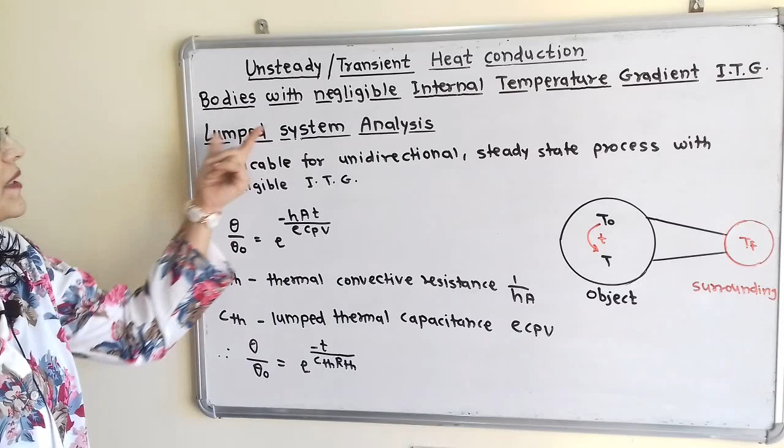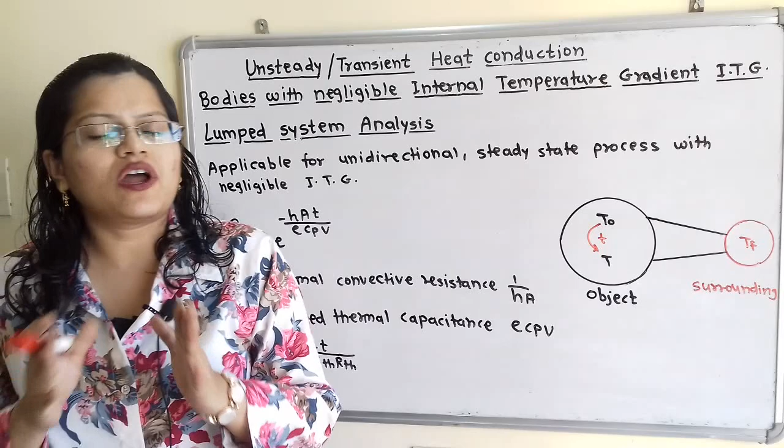During heat transfer process, some bodies behave like a lump. That is, its interior temperature remains uniform at all times when the heat transfer process is taking place. And this is known as the lumped system analysis. And this lumped system analysis is applicable for the unsteady state process when internal temperature gradient is negligible. Now we know that we use the formula for unsteady state process when internal temperature gradient is negligible.

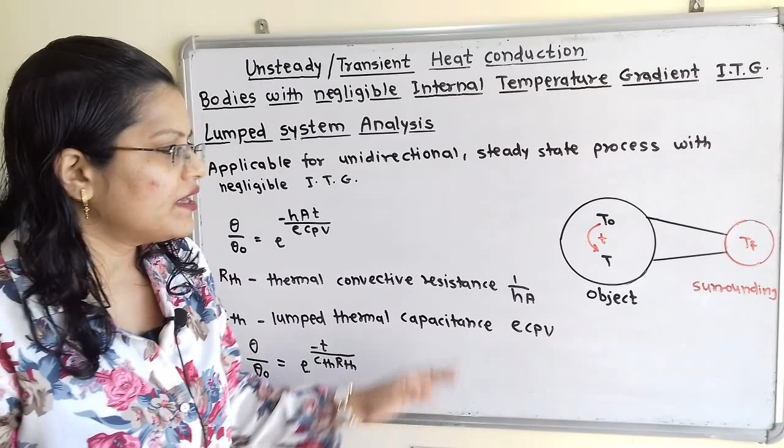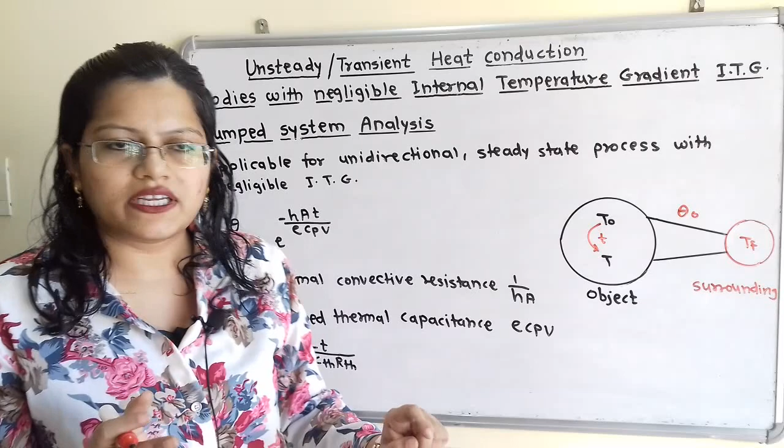Theta by theta O is equal to e raised to minus hAt by rho Cp V. Now we will understand this with the help of this diagram. When the initial temperature of the body at time t equal to 0 is TO and the temperature of surrounding is TF, then the temperature difference between TO and TF we will consider as theta O. Then when the heat transfer process is taking place, after time t, its temperature will become T. Then the temperature difference between T and TF is known as theta.

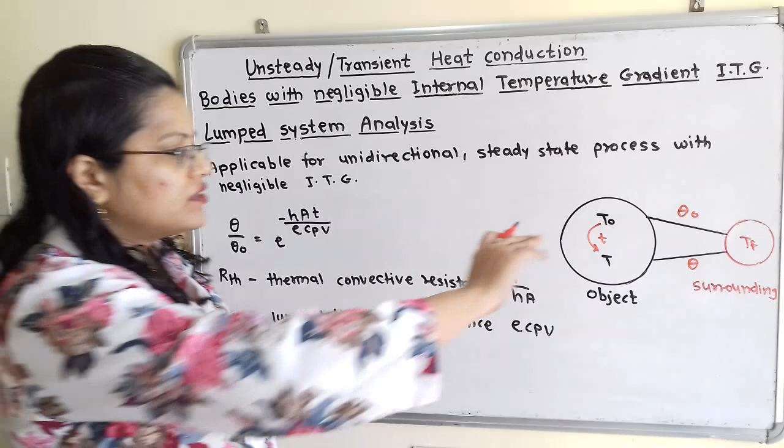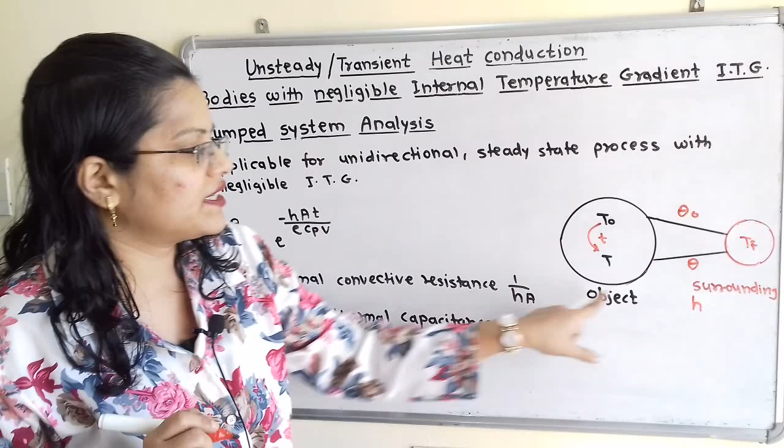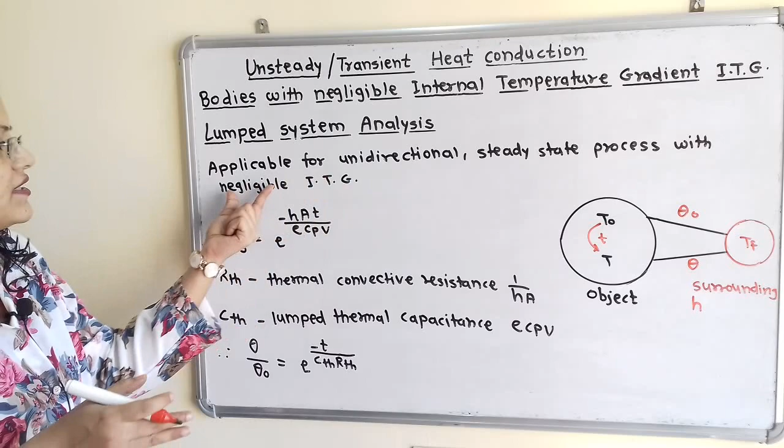Now the ratio theta by theta O is equal to e raised to minus hAt by rho Cp V. So h is the convective heat transfer coefficient, because this object is in contact with the surrounding fluid and this fluid is having convective heat transfer coefficient h. A is the surface area of the object, because the surface area is in contact with fluid. t is the time in seconds. Then rho is the density, Cp is the specific heat and V is the volume of the object. So this is the formula that we have to use, and if we calculate the Biot number and it is less than 0.1, then we can say that the internal temperature gradient is negligible, and then only we apply this formula.

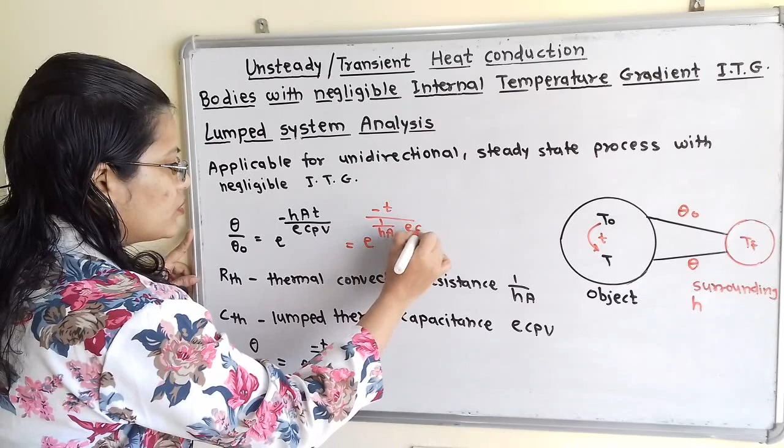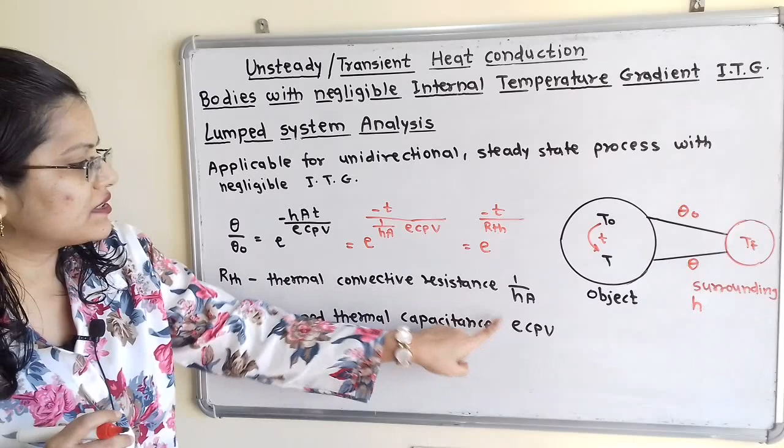Now we will rewrite this formula. I will rewrite this as e raised to minus t divided by 1 upon hA into rho Cp V. Now this RTH, that is thermal convective resistance, is equal to 1 upon hA. So again I will write e raised to minus t divided by RTH into CTH, where instead of 1 upon hA I write RTH, and CTH is the lumped thermal capacitance, which is equal to rho Cp V. So this is the formula that we have to use in case of lumped system analysis.

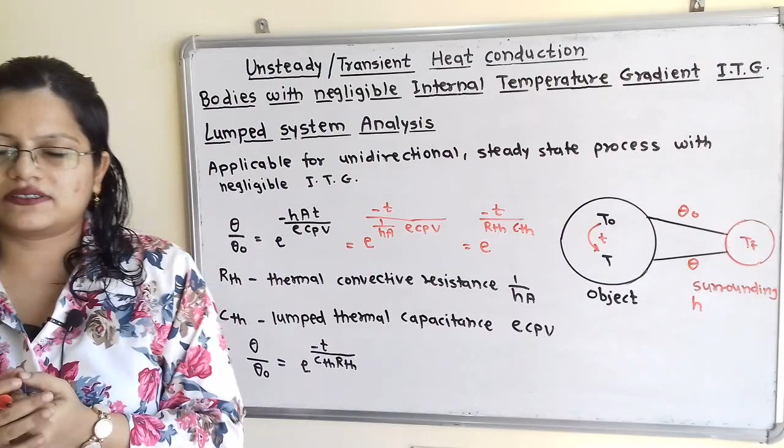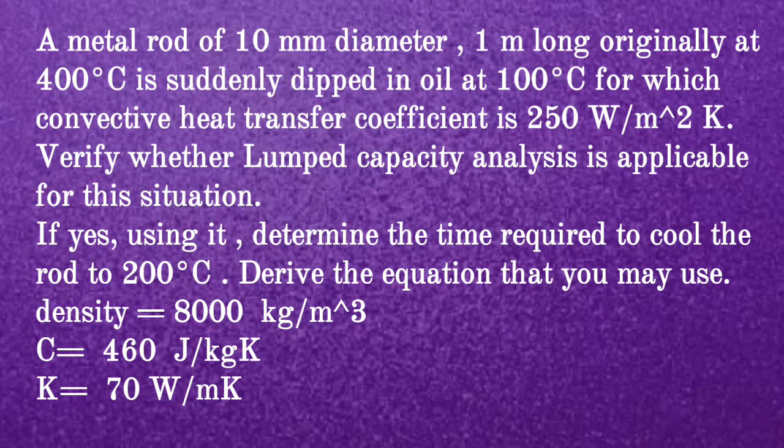We will read the given question. A metal rod of 10 mm diameter, 1 meter long, originally at 400 degrees Celsius, is suddenly dipped in oil at 100 degrees Celsius, for which convective heat transfer coefficient is equal to 250 watt per meter square Kelvin. Verify whether lumped capacity analysis is applicable for this situation. If yes, using it, determine the time required to cool the rod to 200 degrees Celsius. Derive the equation that you may use. Use rho equal to 8000 kg per meter cube, C 460 joule per kilogram Kelvin, K 70 watt per meter Kelvin.

Let us understand the given data with the help of diagram. Here the metal rod is given whose length is equal to 1 meter and diameter is 10 millimeter. The initial temperature at time t equal to 0, TO, is 400 degrees Celsius, and we have to find out the time t when this metal rod becomes temperature T equal to 200 degrees Celsius. The surrounding temperature is given, TF equal to 100 degrees Celsius. So the temperature difference between TO and TF is theta O, and the temperature difference between T and TF is theta.

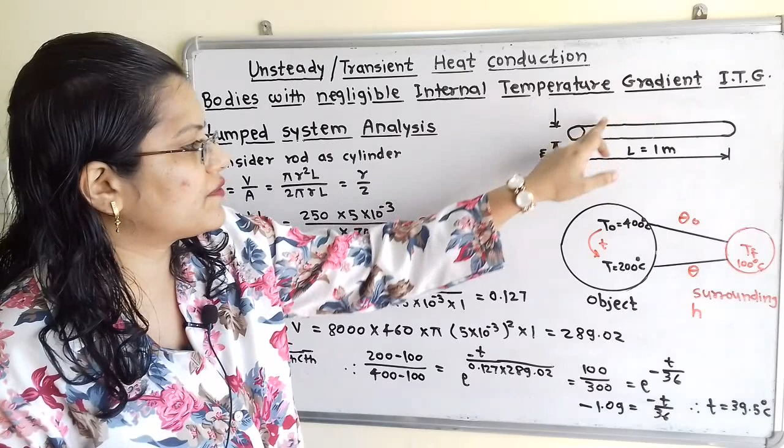Now we will consider this metal rod as a cylinder, and we will first find out its characteristic length L. So L is equal to V by A. So volume is pi r square L divided by surface area. Surface area is perimeter into length, that is 2 pi r L. So if we simplify this, we will get r by 2.

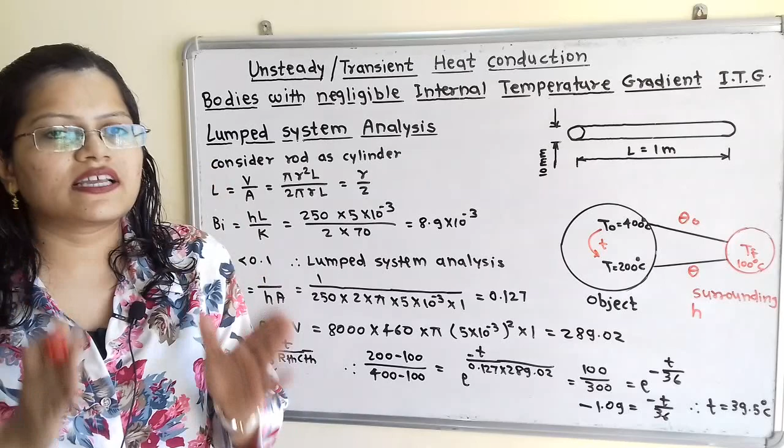Now we will first find out the Biot number, and we will decide whether this given question is applicable for lumped system analysis or not. So Biot number is hL by K. Convective heat transfer coefficient h is given, thermal conductivity K is also given, and L is R by 2. So R is 5 into 10 raised to minus 3, because we have to use the standard unit meter. If we calculate this, we will get 8.9 into 10 raised to minus 3, and this value is less than 0.1. So for this case, we can say that the internal temperature gradient, that is ITG, is negligible. And when there is negligible internal temperature gradient, this is the case applicable for lumped system analysis. Now we will use the formula.

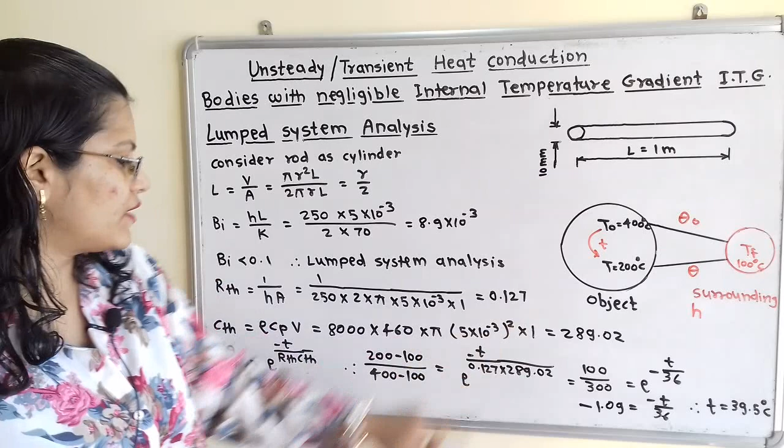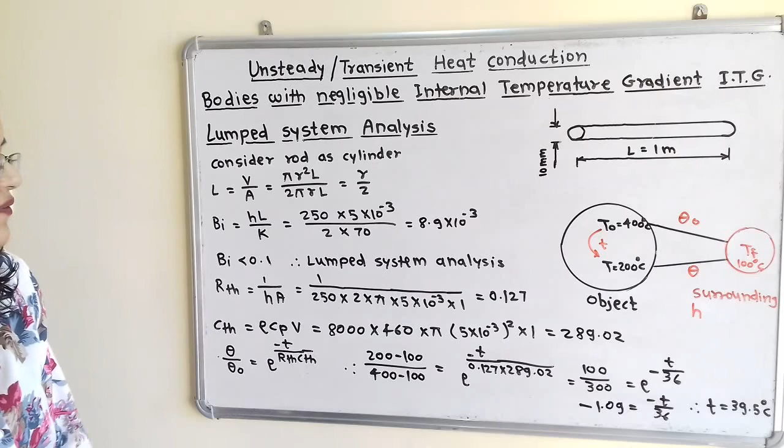So in the formula, we first have to find out RTH and CTH. RTH is 1 upon hA, that is 1 upon 250 into area A, 2 pi R L. So we will put the value, and it is 0.127. CTH is rho Cp V. Rho is the density, Cp is the specific heat, and V is the volume. So V is pi R square L. When we put values, we will get the answer 289.02.

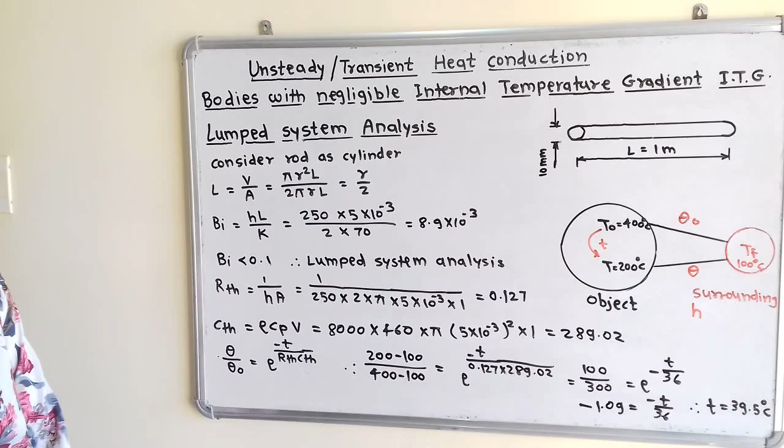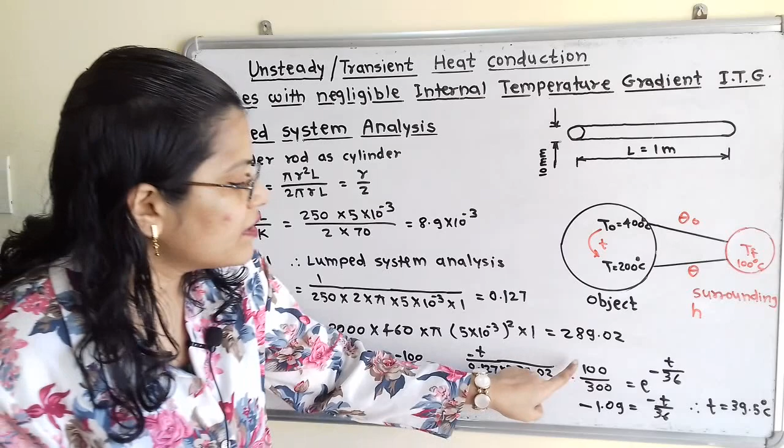Now we will apply the formula. So theta by theta O. Theta is 200 minus 100 divided by 400 minus 100, which is equal to e raised to minus t divided by RTH into CTH, that is 0.127 into 289.02. Now if we observe here, 100 by 300 is equal to e raised to minus t by 36. So if we simplify this, it will become 1 by 3.

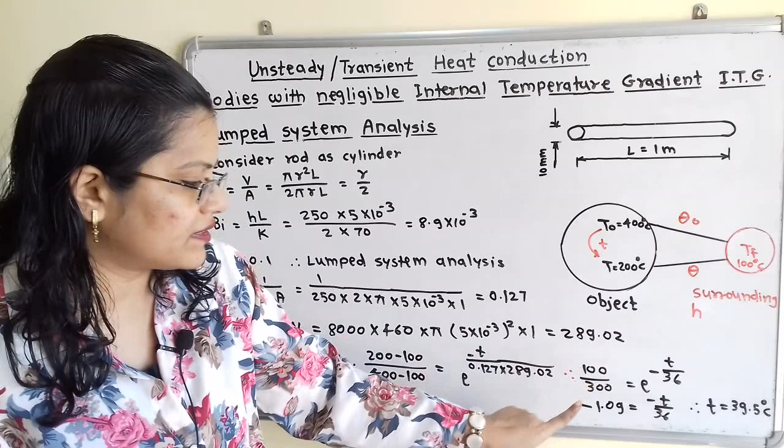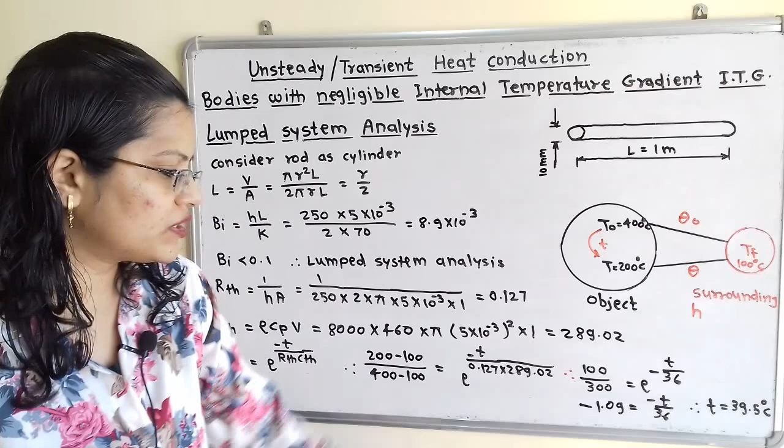Now inverse of e raised to x is ln. So with the help of calculator, we will calculate ln of 1 by 3, that is minus 1.09. And with the inverse of e, this e is getting cancelled. So on the right hand side, it will become minus t by 36. So this minus is also getting cancelled, and t is equal to 1.09 into 36, that is equal to 39.5 seconds. So this is the answer.